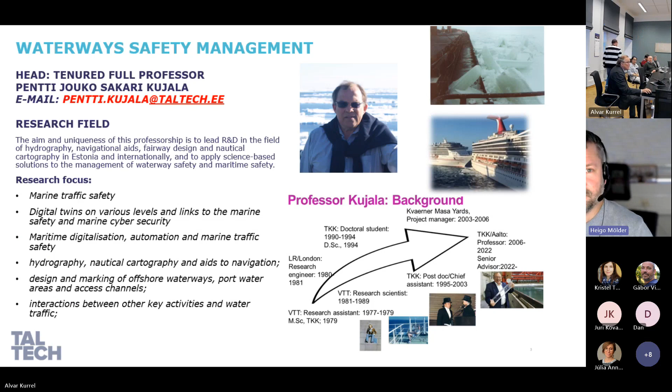Okay, this is not that slide you lost, and this video is interesting. If you can see it, very interesting full-scale testing - can you see the video? But you don't know, I know that you don't remember that. Okay, yeah, very good, we see it.

So they also spent a lot of European Union money to make very interesting testing by TNO in the Netherlands.

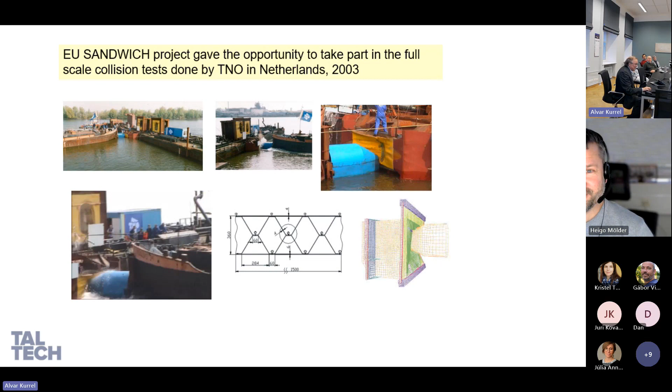But let me say once more that Mr. Kristjan Tabri and Mihkel Kõrgesaar, you might know very well, did their doctorates on that topic. Of course, I have a lot of networks. I have been 40 years in this area, so of course I know every naval architect in academic life in Europe, in the USA mainly Michigan, and in Canada, Memorial University.

In Brazil I know Rio, and I know Rio and Sao Paulo, and then South Africa I know Cape Town. In China I know Dalian, Harbin, Wuhan, and now also Jiaotong in Shanghai. Some contacts in Singapore, some contacts in Thailand, Australia. In Japan I know the ice guys. So that's the background.

And of course I've been quite active on publications, especially when I got my professorship. You can see that I started slowly. About 2010, only very practical work, European Union projects and reports - even very important reports, but no publications. But then I got my own research group in TKK. We started to make publications, and it's still growing. Last year I had 1,300 citations, and this year so far 1,000.

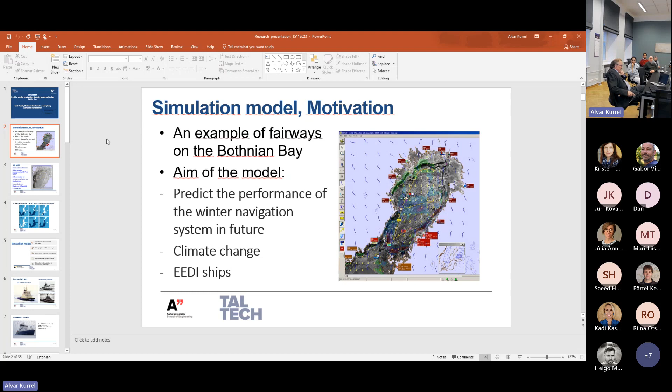There are many big questions for the future. Climate change will affect ice, and environmental regulations will affect vessels - there's less engine power, less icebreaker capability. What effect will this have on the icebreaker need? That's a big question we want to answer.

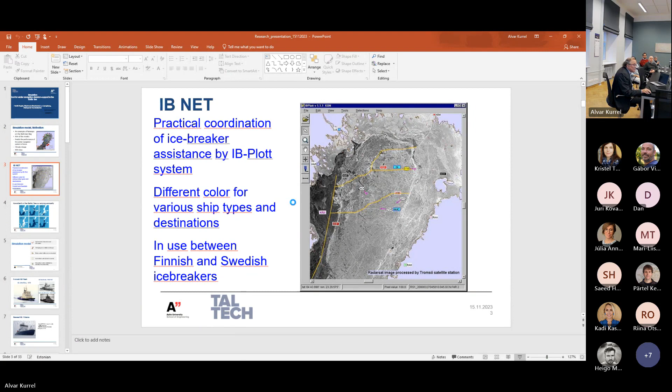And to monitor... I hope they can still see me.

This is IB Net, a 10-year-old system for how Finland and Sweden coordinate icebreaker assistance. They have an internet-based system - they get a satellite picture of ice once a day, and then you can see the vessels here. The white ones are icebreakers, and the colored ones are cargo vessels. You can get a picture of where the vessels are going.

There's one icebreaker assisting cargo vessels here, and the icebreaker is coming there. It's very difficult, and that's what they use to simulate current traffic. Our idea is whether we can make a similar simulation tool to think about the future, not just the day-to-day question - the background is similar, following the cargo and other vessels. As you can see, simulation tools have lots of challenges.

To explain it simply, for open water we have two parameters: wave height and wave period. That's enough to describe everything. But in ice, you can see here there are 1,000 different types of ice given in this picture alone. So we need about 100 parameters to describe ice, and it's changing every hour. We'll come back to that, but that's our challenge.

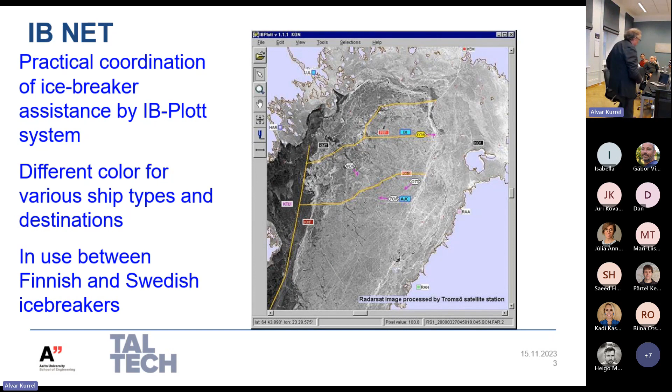So that makes our simulation tool development challenging. The simulation model is basically ship-ice simulation, and we have different ice conditions, different dirways. Dirway means typically the icebreaker will give a path instead of a direct way, going to the easiest ice - they call it the dirway. Direction way describes how it's coming.

We simulate icebreakers, we simulate cargo vessels, we simulate towing, we simulate convoys - trying to really simulate the whole winter navigation system. The bigger challenge so far has been to make a computer model of how icebreaker captains make decisions. We know an experienced captain knows what to do, but it's very difficult to tell the computer what they think. We're still working on that - we've done some interviews and we'll see how it goes. This icebreaker captain coordination problem has been one of our challenges.

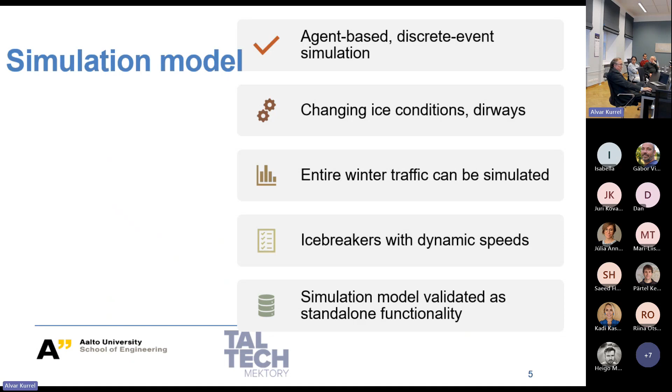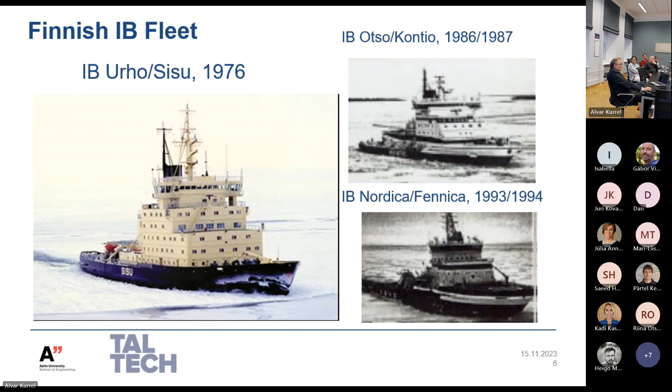We've done some validation and so on. In Finland, we currently have 6 icebreakers: the Urho class, Otso-Kontio class, and Nordica-Fennica class. And we actually have 7 including the new Polaris ones - so 6 quite old ones, and the newest one is the icebreaker Polaris, a powered vessel built at the Helsinki shipyard. That's our icebreaker fleet.

When we start simulating navigation in ice, here's an example - this is one vessel, Kemira, my favorite, a chemical tanker. I used the Kemira a lot for my doctorate thesis, so I spent a lot of time on this vessel. In 1987, '88, '89, I was spending almost the whole winter on this chemical carrier. The Kemira came from Central Europe to Kokkola and other ports.

Here you can see - when we're in open water before the ice, it's constant speed, constant power, very easy. But when we come to ice, anything can happen. If we're stuck in ice, we wait for icebreaker assistance, get it, then stop again, and wait for icebreaker assistance to go forward. This shows how difficult it is - it's now 3 hours, with speeds of 21, 14, 13, 16. This can all happen within 3 hours.

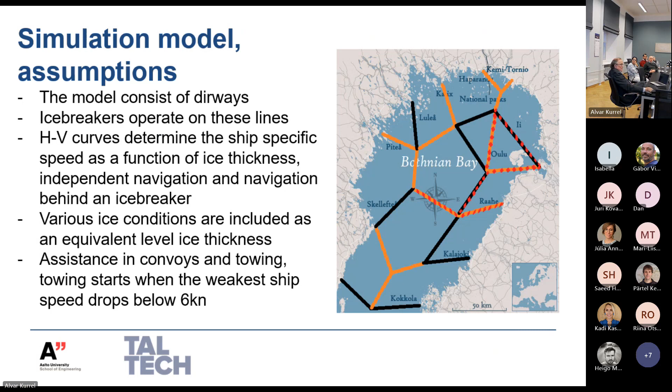So that's this - it's a typical H-V curve. The functional level ice thickness is the thickness and your speed. So typically every vessel is now one icebreaker, so they can break about 2 meters of ice, so the speed is 0 after 2 meters. And then we have the icebreaker can move up to 20 knots.

So that's not here - this is now in level ice, and this is channel ice. Channel ice means behind another vessel, or when it is behind in the broken channel, so the speed is higher than in level ice. So for every vessel we have been developing these curves - we have about 40 curves for different cargo vessels. Then, knowing the main dimensions, engine power and hull shape, we can roughly estimate these H-V curves quite quickly. That's one of the tools we have.

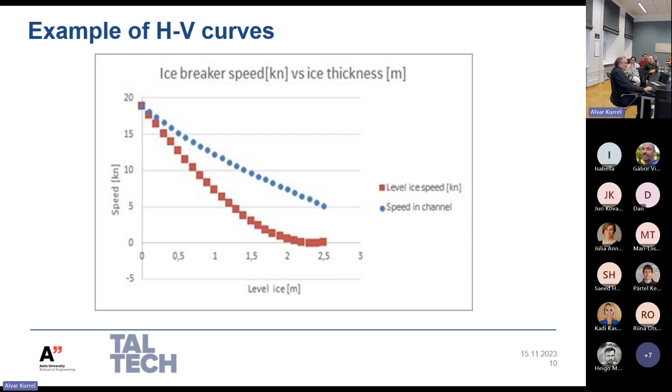Let's see if this works. Very simple about the simulator tool. Well, the different colors are not semantic, it is a different ice thickness.

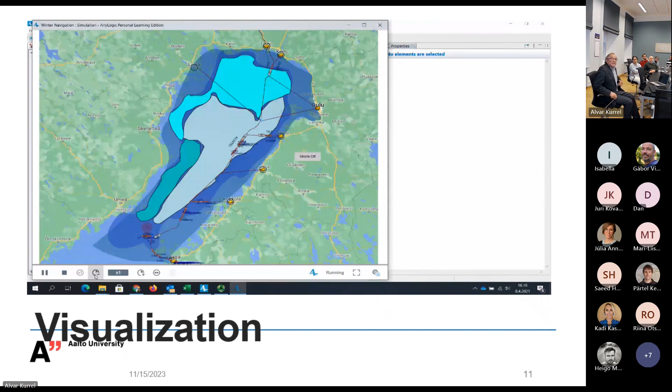And then we see that we simulate the whole traffic. Ships are coming, icebreakers are coming, and then icebreakers are helping the vessel go to the harbor, and then they wait when they come out. So as you can see, it simulates the whole thing with the navigation systems. If we have AIS data, we know that the vessels are coming here, and after that we start to simulate so we know this starting point and how long they are in harbor, and otherwise we simulate what happened between those events.

And then, there's a lot of work of course done behind this. We have a long history actually in how we can simulate ice breaking, so a lot of work behind it. I have even educated myself with a few doctoral students - this is slides from my doctoral work.

So what happens when we have wind? For example, when we have wind, the ice sheet is floating, and the ice breaking will change. So we have simulated that numerically, and then we have the model scale testing.

I have to open another file. Let's see. You want the icebreaker? Yeah, it's got an ice tank in Otaniemi.

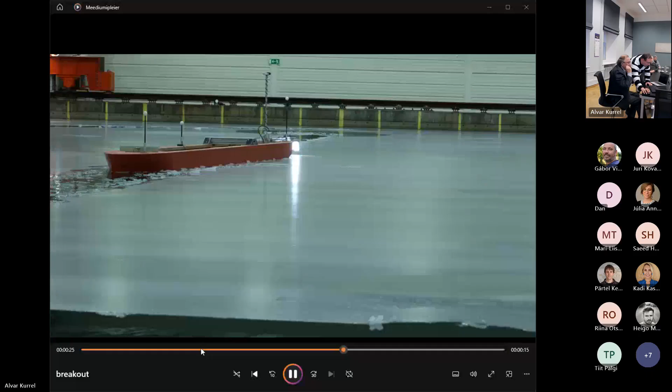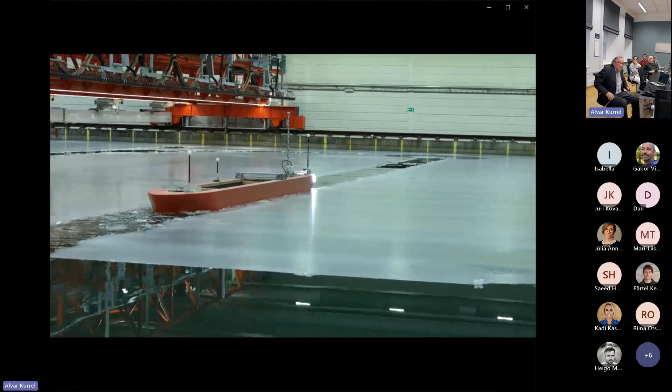Now you can see it. We do this nicely, but scale testing is tricky as such because we have to scale the model, about 1 to 20. And that's how to scale the ice for the 1 to 20 - 20 times thinner.

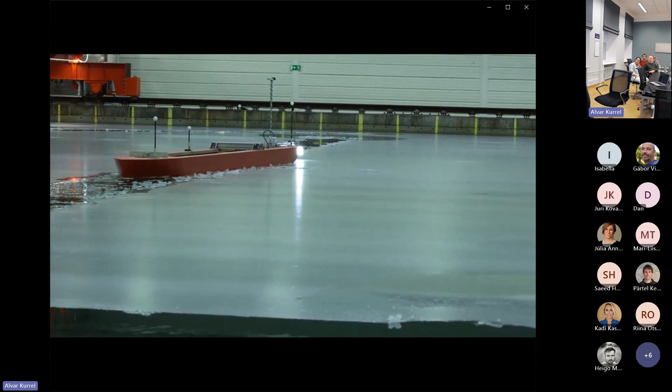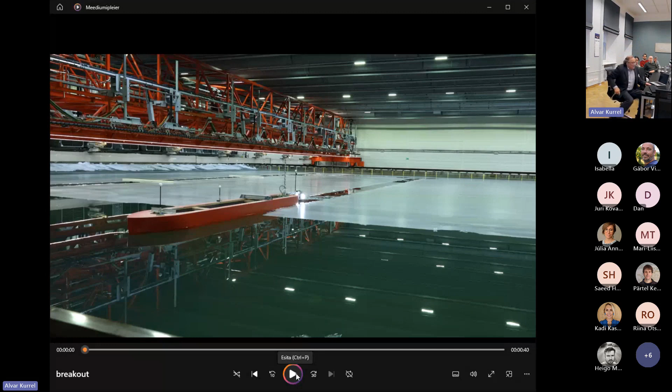And 20 times weaker than real ice - how to make it 20 times weaker. And that's how it goes. Let's get this in. Now I have to change back to them, okay.

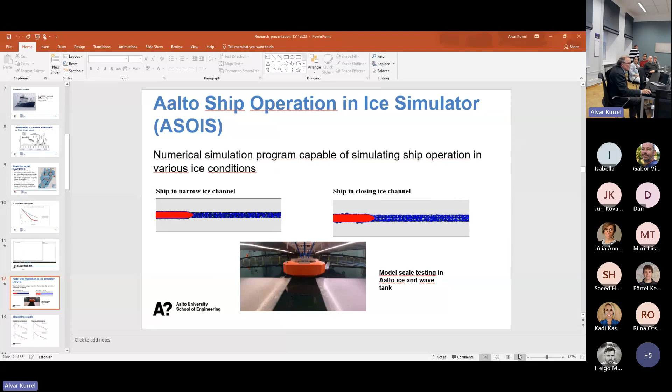So the idea is that we have model scale testing, we have full scale data, and we have numerical modeling about the ice breaking. So together on this, we can get the comparison, and here we can see that - comparing now, we have a 36 centimeter thick ice measured and simulated.

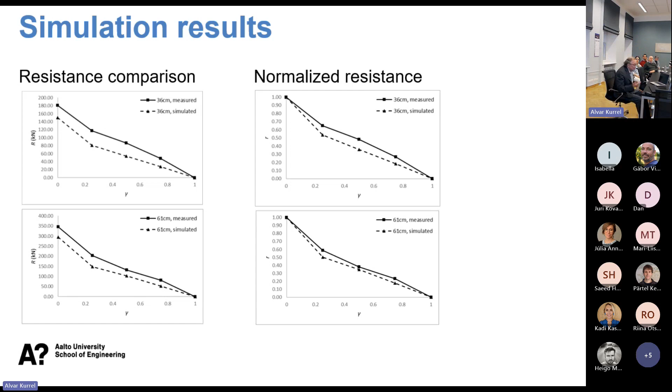But anyway, we have done this validation, so we have the ice figure, and then we have been developing this for different vessels. We have the database about vessels navigating in the Baltic Sea, especially the Finnish harbors.

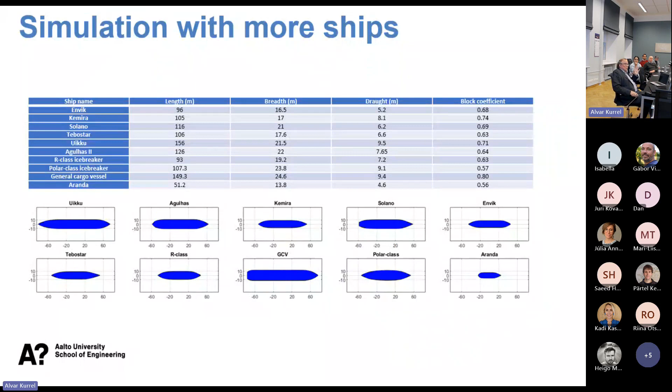And for every vessel, we have done similar HV curves. So that's the idea that when we know the main dimensions - length, breadth, draft, block coefficient, and hull shape - we can evaluate these HV curves for every vessel. That's how our simulation model works.

There's some differences based on the hull. We have developed a regression formula where we have the main parameters of the vessel, and the main hull angles of the vessel. So that's how our simulation is working.

And then we have different vessels that behave different ways. Agulhas is a very good ice-going vessel, built in Finland for South Africa. The blue curve is level ice thickness, so in level ice the speed is less, but when you go to the channel ice floes, the speed is higher, so the different curves are different.

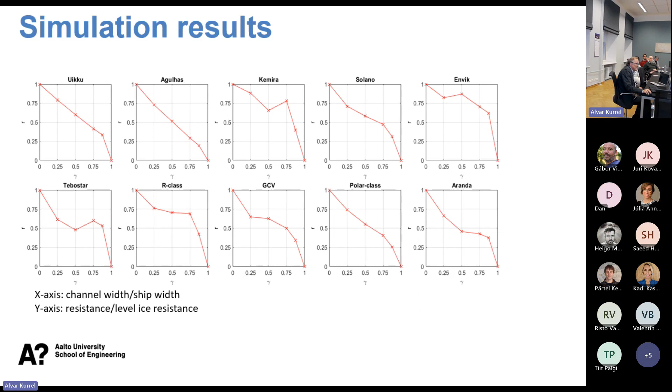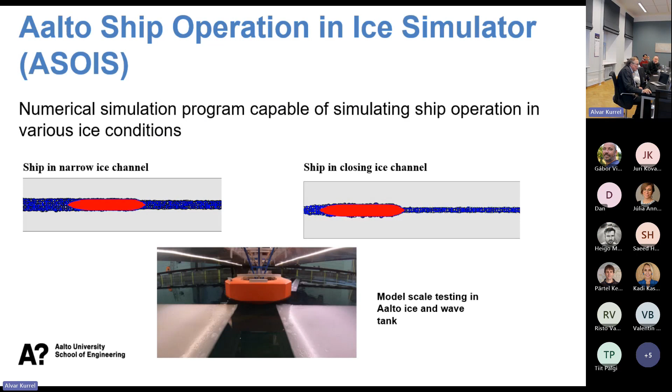Although we have a parameter here, this gamma is the channel parameter. Gamma is 0 when channel is closed, and gamma is 1 when it's the same as the ship breadth. So that's the idea.

When you have a very closed channel, it's like level ice. So a very closed channel is the same as level ice. Actually, the channel curve comes to the level ice curve in that case.

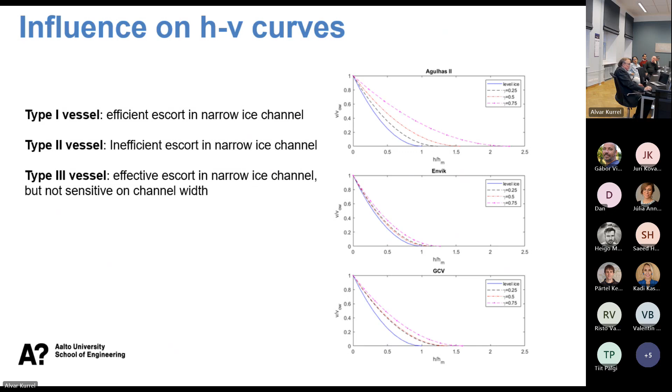And then different vessels - Envik is very bad. It's a bulk carrier, but it has a very vertical bow, so it's very bad also in channel. So every vessel behaves a bit differently. That's one part of the simulation tool.

And then this equivalent ice thickness is another story. If you look at the normal ice here, our idea is that we change whatever ice we have to equivalent solid ice thickness. So we have only one value, because all our HV curves are based on speed and equivalent ice thickness, so we make it equivalent - we have level ice, new ice, ridged ice. So then we try to call it equivalent ice.

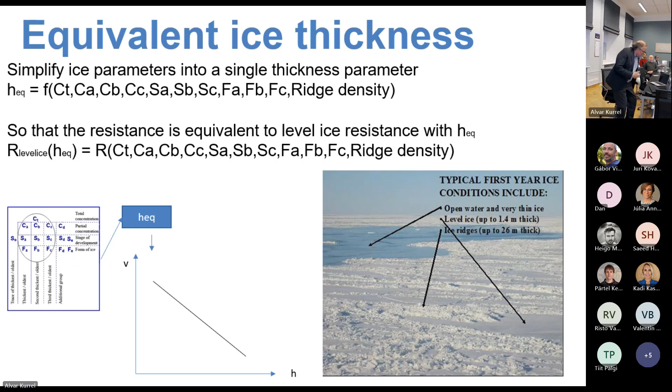There are many ways to do it. One simple way is geometrical equivalence. As you know, in a ridge we're going to have about 10% above, 90% below, because ice density is over 90%. So always 10% of ice we can see above the water, and always 90% is below the water.

Then we have ice ridges. So the kind of volume equivalent means that we just calculate the total volume and change it to the equivalent thickness. That's very simple - only geometrical equivalence, not physical equivalence. It works sometimes, it gives us some value.

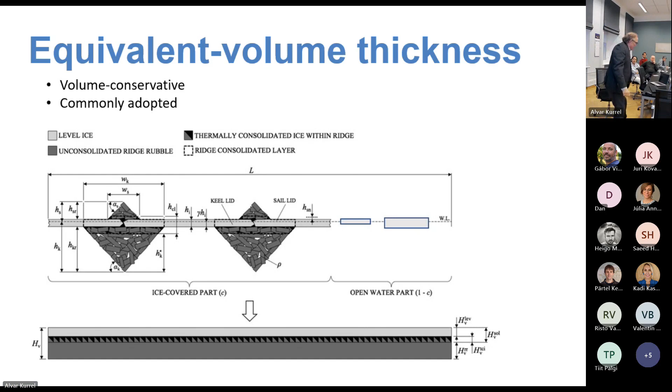But then we have different methods to do the equivalent like this. The basic idea given here is that whatever ice we have, we simulate it by level ice thickness. So that's the background for equivalent ice thickness.

And then some case studies. I have one case study from Finland, and then some case study from Estonia. The first one, done some time ago, is a one month simulation of ice. As you can see here, we have one Urho-class vessel, two Otso-class vessels, and Ymer, Atle, Frej - Swedish icebreakers, very similar size to this Urho-class.

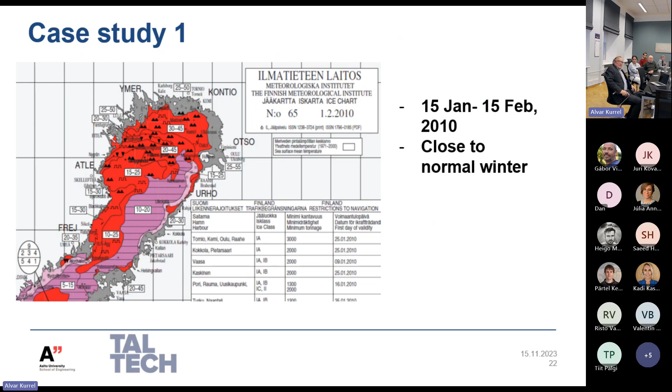And the ice thickness was about 10 to 45 centimeters in that case. We simulated 1 month, so we had about 200 or 300 1A-class vessels in that time, and about 100 1A Super ice-class vessels on that area.

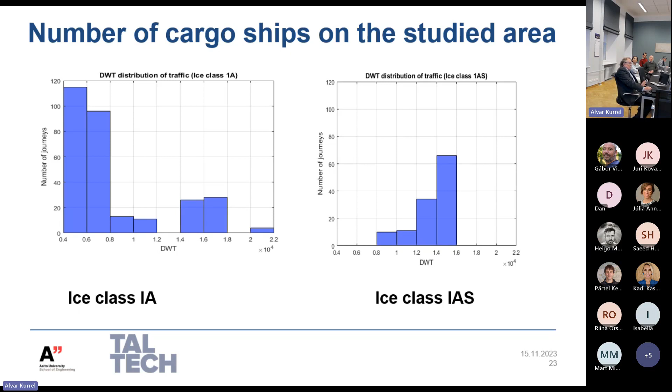And what we did - our main KPI is, according to Finnish icebreaker systems, the waiting time of vessels. Our government has this because everybody has to pay this harbor fee, which is very expensive in Finland, but our government guarantees that the maximum icebreaking waiting time is 4 hours. So everybody follows this: how long cargo vessels have to wait for icebreakers, and it should be below 4 hours on average.

It can be higher, sometimes lower, but on average the waiting time should be less than 4 hours, and that basically works in a normal winter, but in a hard winter, 4 hours is demanding. The main result here is that we simulated the waiting time not for the whole winter, only a 1 month period, and when we calculated the waiting time based on our model, we got only 2% difference to the real values. So the waiting time model seems to work very well.

We have some other challenges - this simulated model's 2% accuracy isn't really representative for all cases in this waiting time analysis. It works, but for some other parameters the accuracy is 20-30% or whatever. It's because there are so many parameters, but we are working on improving that.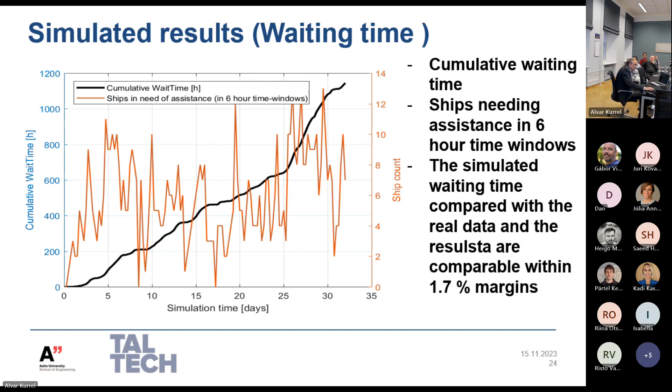Basically, this tool will tell us quite nicely the waiting time, and then we can work with that. Another interesting story is what is the total waiting time? Today, the total waiting time, if we calculate all the vessels...

Can I ask a question? We had a very good seminar in Kotka last week, and one of your students, Alexander, presented his studies where he said that instead of having this waiting time as a KPI, it could also be costs or environmental figures. That sounded very good. So if Alexander's ideas are put into this model, we can get totally different results.

Eero Hokkanen says: more icebreakers, no, we can't start from that, we have to start from the model we made up. It was very, very interesting, and Eero Hokkanen from the ministry was very interested that we should develop these ideas to have other KPIs.

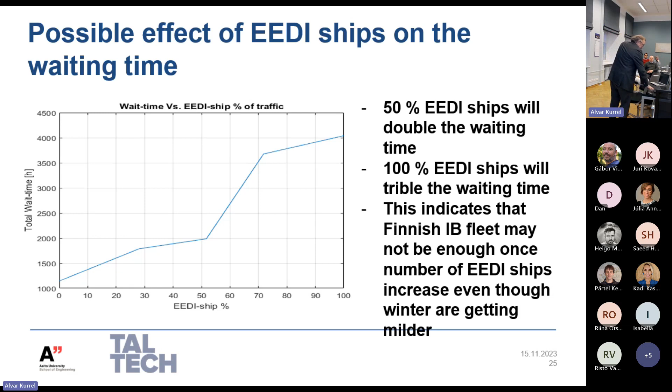That's how you calculate CO2, how much you want to pay for the CO2 value. If you calculate how we save CO2 and how much you want to pay, that's better for the rest. So anyway, the two can be used.

And then the other icebreaker study with Ulla last summer - the idea was how many icebreakers Estonia will need until 2050. That was our task. It's hard, I can come back to that.

Actually, we didn't have a simulation tool, so we actually made fairways for Estonia, and it was very busy times, we had very little time to do it. So our researchers were working hard to change it.

So we wanted to simulate all of Estonia, with the best graphics included in the simulation tool. And as conditions, we got data from the Baltic Maritime Institute, I think.

And then we had, I'll come back to that, we had actually two scenarios: one icebreaker always per year, or then 1 to 3 icebreakers on the part of Finland. That was our scenario we were studying. The idea is that icebreakers assist the vessels that have been waiting for long - that's one simple way to think about icebreaker assistance, and then they can make convoys.

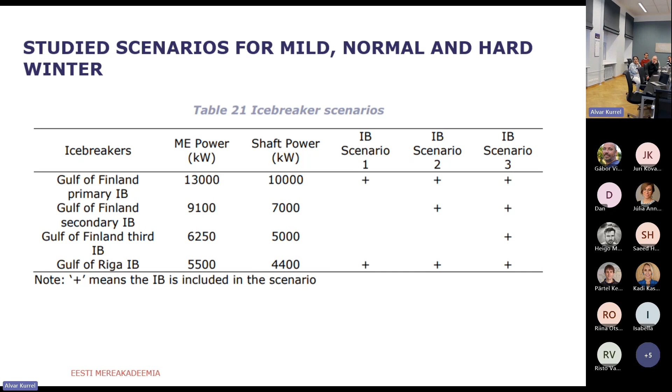Icebreaker scenario one: we have only one icebreaker on Gulf of Finland, one on Gulf of Riga. Scenario two: 2 icebreakers, Gulf of Finland. Scenario three: 3 icebreakers, Gulf of Finland, always one.

Our idea was to study what happens to the waiting time and what happens to the fuel consumption.

Here you can see we define this with the maritime institute. We define what is mild winter, what is normal winter, what is hard winter. And then we make evaluations until 2030, 2040, 2050.

The main conclusion is that the probability of hard winters is coming down, but it's not zero - it's not even close to zero. I think the best estimate is that 10% of winters are hard winters, so once every 10 years we still have a hard winter. There are more mild winters, more normal winters, but anyway, we cannot forget that we can get a hard winter.

So yeah, here is the aspect. As you know, we have EVA-316, we have Botnica, and we have the Tarmo. And as you can see here, we have a protector for restoration - it's a tug, an ice tug that can break ice. But it's a Finnish company. So that's the present system.

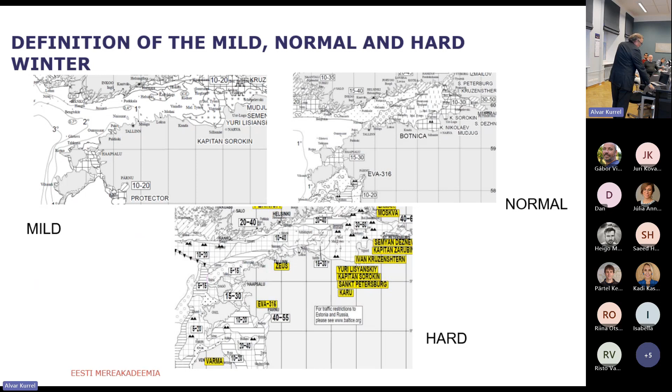So we simulated all these winters using 2018 data. Again here we use AIS data - how many vessels are coming in here from east or north. The AIS data gives us how many vessels are coming, and then we simulate what happens after that.

Here's the final result. If we have icebreaker scenario 1, with 2 icebreakers, on mild winter the waiting time is low - if we want a 4-hour waiting time, that means 240 minutes as a KPI. For mild winter, everything's okay - icebreaker scenario 1 is enough.

On average winter, icebreaker scenarios 2 and 3 are okay, but scenario 1 gets quite long waiting times. So 1 icebreaker in Gulf of Finland is not enough on average winter.

On hard winter, even icebreaker scenarios 2 and 3 are very challenging. Even the 3-icebreaker case gives quite long waiting times, but only for a very short period.

The main conclusion from our study was for average winter: for Estonia, we need 1 icebreaker in Gulf of Riga, 2 icebreakers in Gulf of Finland. So that was our conclusion.

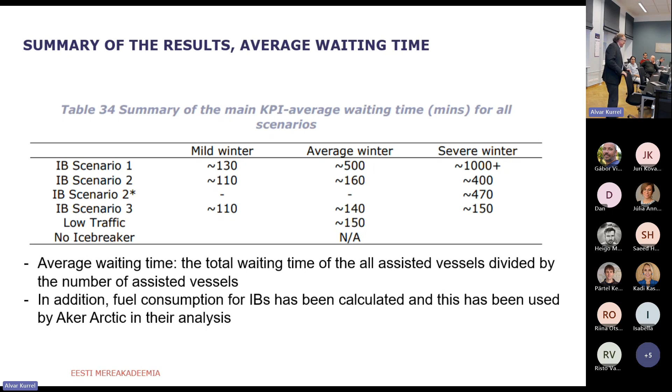Now we see in future what happens - is anybody listening to our recommendations from that? What we think is good for Estonia?

The conclusion is that we have a simulation tool. We are still ongoing - it's very interesting. Nobody else has done anything like that anywhere in the world. Nothing similar exists for the Arctic or Antarctic.

As we heard from Ulla, at the moment it can be used only during this waiting time, but we can also think about future environmental regulations, economic aspects, and many other purposes. Actually we can cooperate with Aalto and Taltech to develop the model, since it's basically an Aalto University model, so it's a very open model. I'm sure Aalto would also be happy to develop it together.

Like Ulla's group, it might be a good idea to think about something, because the economic part is very complicated as well - it's very interesting, even the concept of which costs you take into account, just like you said.

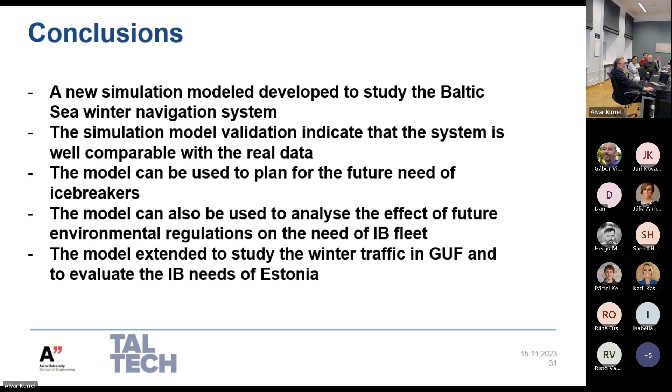Good questions - that was a short story about one area, about 45 minutes, so good.

Any questions, anybody? Okay, I'll start. I can continue, I'll have to stop my questions at one point if they're coming to me.

But first of all, you have come here as a professor of waterways safety management. What does it mean and how does it differ from your previous work? What do you have in mind, what kind of things do you have in mind, and where is the challenge, the topic you are answering in this professorship?

Yeah, I think safety is safety, monitoring safety is the same, but of course the Baltic has its own aspects. You want to change it, but it doesn't actually - it's not very important, like for me, to remember what I want to do.

Most important is to understand what is a strong part of Baltic. I know that Baltic is very strong on its hydrographic, for example, in hydrography, cartography, and navigation - we didn't have that in Aalto. So that's one important topic, how we can combine that expertise in Baltic, also education and research.

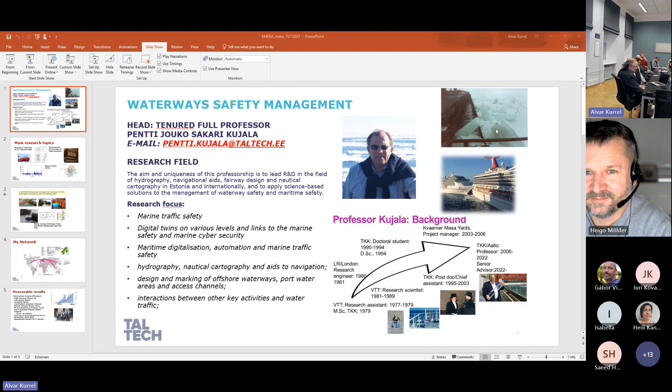There are also some ideas in Estonia to push the ice down and somehow make it work, but it's a lot of discussion and still nobody has made a breakthrough. But if you have a good idea, I'm happy to think about it. I don't have one, but I just think that all these kinds of vessels are so big that maybe there is some other way. Or maybe to build a ship with a higher ice class.

One is super plus, to make it independent navigation. That's another part of the economic story. Then you have a very powerful cargo vessel, more economic than icebreakers. One addition to our economic equation.

All our towing ships have also very good ice classes, so they can operate, I think, with 1 meter thickness of ice. But today the ship owners don't want to invest on this because they have icebreakers. But if you have some economic benefit that encourages investment on better ice-going vessels, that can be a possibility - that we pay ship owners some money, not to build icebreakers, but to make better vessels. It's one economic equation here.

One remark - I think about autonomous vessels, the remote controlled vessels may initially be more of a solution. Yes, that is coming as well. That's the first step, remote control. You have people on board, but with a little bit of remote control. Because, as you underlined, when you had this communication between the icebreaker masters, it was quite difficult to determine all those things in the model.

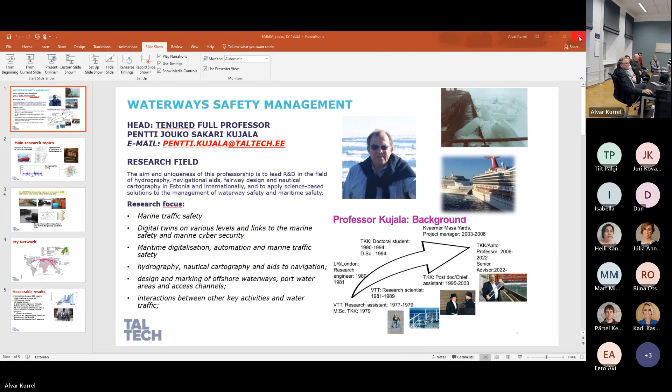Do you have something more? No, I don't have, no, thank you. I have many paper presentations, but one hour is enough for everybody. Next year, another topic - let's see what it is.

So you have this seminar once a year? Everybody will have it once a year or not? I don't know, I think we will do even more seminars, because we don't have so many people now. So you will not limit your presentations to only once a year. Properly.